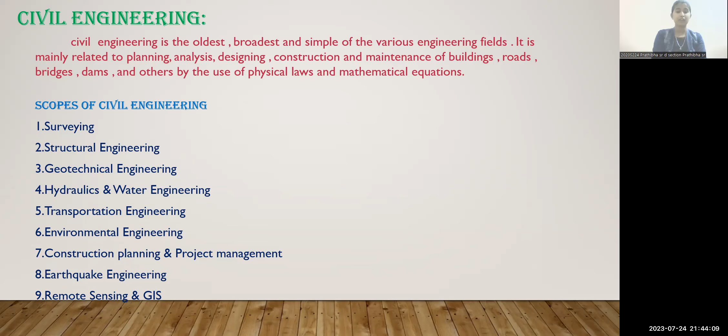Let us see what are the scopes of civil engineering: surveying, structural engineering, geotechnical engineering, hydraulics and water engineering, transportation engineering, environmental engineering, construction planning and project management, earthquake engineering, and remote sensing GIS.

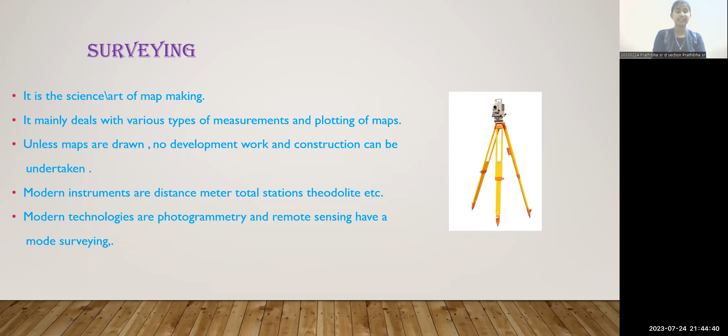Let us see what is surveying. It is the science or art of map making. It mainly deals with various types of measurements and plotting of maps. Unless maps are drawn, no development work and construction can be undertaken. Modern instruments are distance meter, total stations, theodolite, etc. Modern technologies like photogrammetry and remote sensing are also modes of surveying.

Building materials: the materials used for construction of any structures are called building materials. Shelter is the basic need for every human being. The important factors considered while selecting materials are durability, strength, appearance, cost, availability, and labor requirements.

Building materials are mainly divided into natural, like sand, stone, timber, etc. Second one, artificial, meaning man-made: bricks, cement, concrete, flooring or roofing tiles, steel, glasses.

Concrete is a mixture of fine aggregates like river sand, coarse aggregate like jellies, and cement. Fine aggregates are particles with each size less than 4.75 millimeter sieve. Next, coarse aggregate: particle size more than 4.75 millimeter.

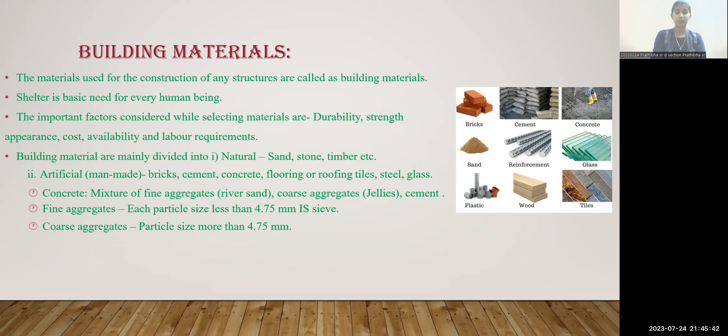Next, geotechnical engineering. It mainly deals with the study of soil, its types, and their properties. Soil properties may change from place to place, depth to depth, and even in the same place season to season.

Any buildings, bridges, dams, or retaining walls, etc., consist of components like foundations. The foundation is laid from a certain depth below the ground surface till a hard layer is reached. The soil should be thoroughly checked for its suitability for construction purpose.

The study dealing with the properties and behavior of soil under loads and changes in environmental conditions is called geotechnical engineering. Geotechnical engineers analyze the soil to determine its suitability to support extreme loads. Proper geotechnical engineering is essential for safe and secure structures.

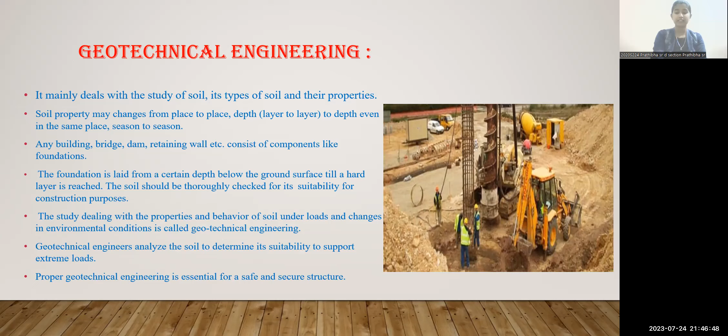Next, structural engineering. It deals with analysis and design of various structures like steel structures, trusses in industrial buildings, towers, etc., and concrete structures like buildings, bridges, dams, etc. Analysis means assessing or determining the internal force or stresses developed in structural components of any structure due to applied load.

Next, designing: fixing or finding the suitable dimensions for structural components of any structure using various methods is called design.

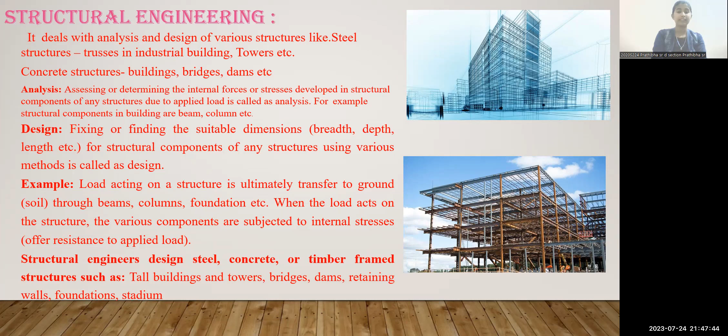For example, load acting on a structure is ultimately transferred to the ground or soil through beams, columns, foundation, etc. When the load acts on the structure, the various components are subjected to internal stresses. Structural engineers design steel, concrete, or timber frame structures such as tall buildings and towers, bridges, dams, retaining walls, foundations, and stadiums.

Next, construction planning and project management. Construction management deals with different types of construction of structures like buildings, roads, bridges, etc., including construction of underground tunnels using modern equipment.

Construction of floating structures: earlier days, only manpower was utilized for construction, but development of new technology, for example manufacturing of new machineries like cranes to lift weight, painting machines, plastering machines, concrete or tar laying machines, have made construction easier and faster.

Planning management involves planning for construction equipment and machinery for a construction project. It deals with planning, scheduling, and execution of construction activity related to a project, and comprises materials, time, and money management. Emphasis will be on new construction practices such as precast construction and pre-stress construction, safety of men, and utilization of marginal materials, etc.

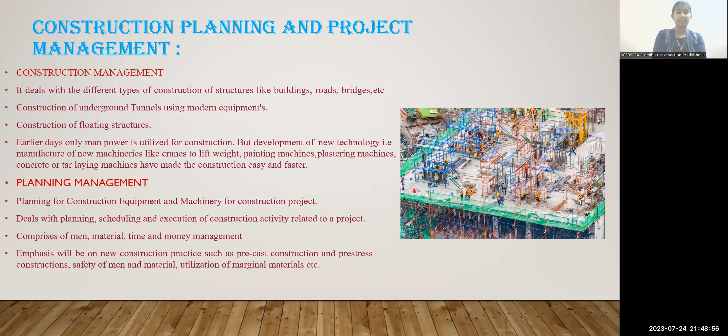Next, hydraulics and water resources and irrigation engineering. In hydraulics, as we know, water is a very important need for all human beings.

It mainly deals with the study of mechanics of water and its flow characteristics like pipe flows, open channel flows, dams, irrigation, hydropower, etc. Applications include determination of fluid properties such as density, vapor pressure, etc., and design of hydropower.

Water resource and irrigation engineering deals with tapping or storage of water and supplying water to agricultural fields for crop cultivation and drinking purposes, and to other domestic or industrial uses. Suitable water resources are identified and stored. Identifying, planning, and building water retaining structures like dams and tanks, and carrying stored water to needy areas is known as water resource engineering.

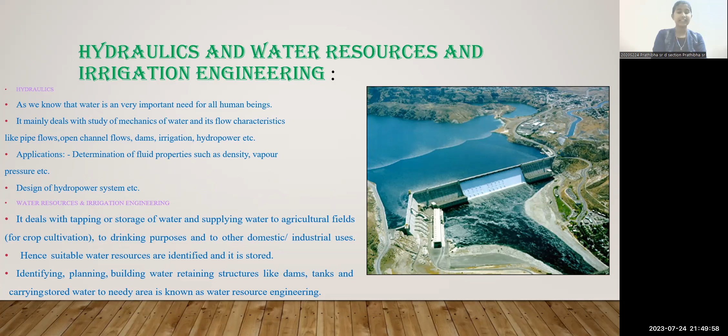Transportation engineering plays a very important role in economical development of a country. It mainly deals with study of existing transportation systems and their improvement for safe drive. It mainly includes design, construction, and management of roads, railways, navigation, and air routes.

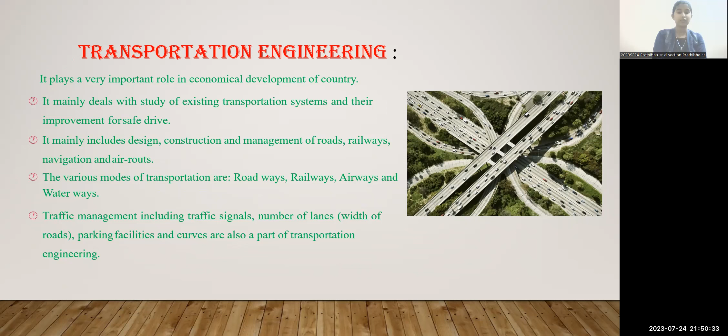The various modes of transportation are roadways, railways, airways, and waterways. Traffic management, including traffic signals, number of lanes, width of road, parking facilities, and curves, are also a part of transportation engineering.

Remote sensing and GIS is one of the new fields. The improvement in space technology and availability of GPS enhanced the scope of geographic information systems. Good mapping techniques help to get required information accurately and quickly to effectively manage and monitor the available resources for optimal use.

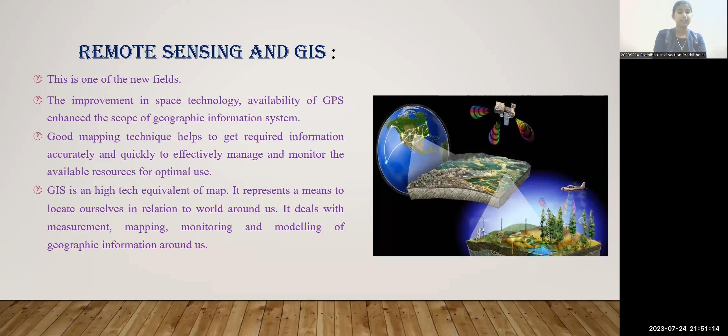GIS is a high tech equivalent of a map. It represents a means to locate ourselves in relation to the world around us. It deals with the measurement, mapping, monitoring, and modeling of geographic information around us.

Earthquake engineering. An earthquake is a sudden and rapid shaking of the ground due to passage of vibrations beneath, caused by transient disturbance of elastic or gravitational equilibrium of rocks.

The scientific study of earthquakes is called seismology. Earthquakes are measured using observations from seismometers. Seismic waves are recorded on instruments called seismographs. The time, location, and magnitude of an earthquake can be determined from the data recorded by seismograph stations.

Earthquakes with magnitude of about 2 or less are usually called micro earthquakes, and are generally recorded only on local seismographs.

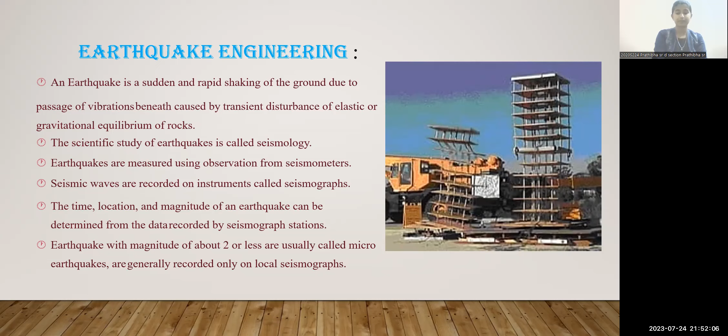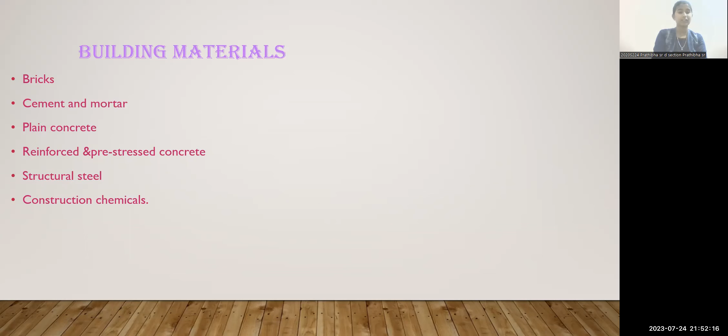Now let us see what are the types of building materials: brick, cement and mortar, plain concrete, reinforced and pre-stressed concrete, structural steel, and construction chemicals. Let us see one by one.

First, bricks. Bricks are obtained by molding clay in rectangular blocks of uniform size. As these blocks are of uniform size, they can be properly arranged, are light in weight, and hence bricks replace stones.

Classification: bricks can be broadly divided into two categories. One is unburnt or sun-dried bricks, and the other is burnt bricks.

Unburnt or sun-dried bricks are sun-dried with the help of heat received from the sun after the process of molding. These bricks can only be used in construction of temporary and cheap structures. Such bricks should not be used at places exposed to heavy rains.

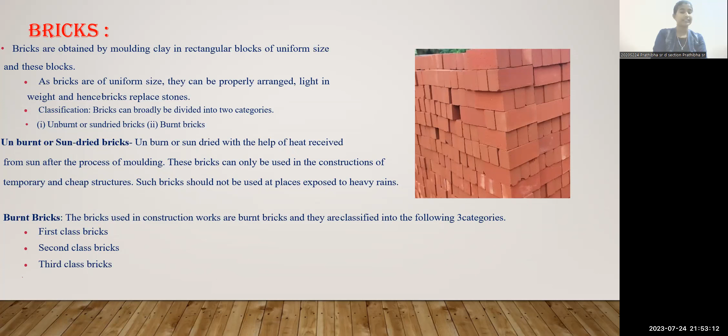Next, burnt bricks. The bricks used in construction works are burnt bricks, and they are classified into three categories: first class bricks, second class bricks, and third class bricks.

Let us see cement. A cement is a binder, a substance used for construction that sets, hardens, and adheres to other materials to bind them together.

Types of cement: ordinary Portland cement, commonly called OPC. It is a type of cement that is manufactured and used worldwide. OPC cements are available in three grades: 33 grade, 43 grade, and 53 grade.

Portland Pozzolana cement, PPC, is prepared by grinding fly ash with Portland cement. It is also produced by adding pozzolana with the addition of gypsum or calcium sulfate, or by intimately and uniformly blending Portland cement and fine pozzolana.

Portland slag cement is a type of Portland cement obtained by mixing Portland cement clinker and gypsum with granulated blast furnace slag in suitable proportions and grinding them into a thorough and intimate mixture.

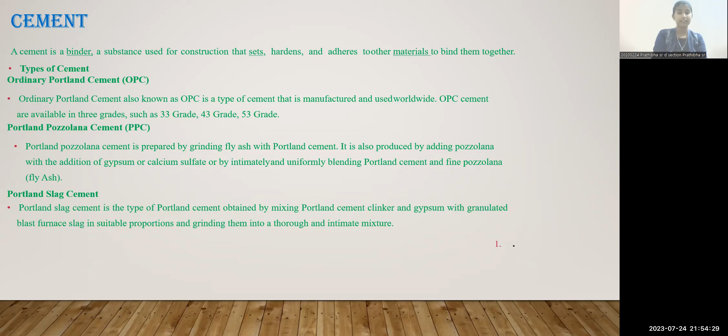Grade of cement. The grade of cement indicates the strength of the cement, generally measured as compressive strength. Compressive strength is the strength of cement molded in a standard cube after 28 days of curing.

33 grade cement means that the compressive strength of the cement after 28 days is 33 Newton per millimeter square when tested as per Indian standard under standard conditions. Next, 43 grade cement.

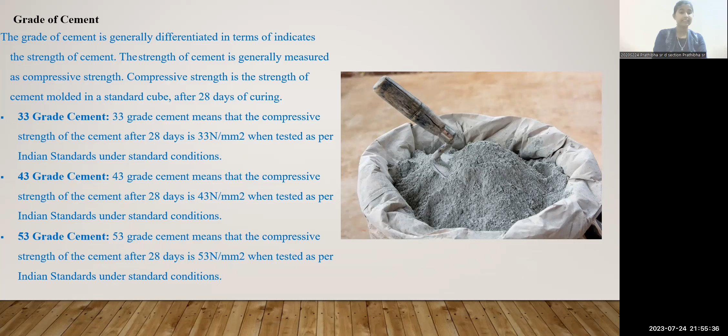43 grade cement means that the compressive strength of the cement after 28 days is 43 Newton per millimeter square when tested as per Indian standards and under standard conditions. 53 grade cement means that the compressive strength of the cement after 28 days is 53 Newton per millimeter square when tested as per Indian standards under standard conditions.

Next, let us see more about mortar. It is the mixture of cement, sand, and water. Uses of mortar: mortar is used between the joints of the bricks during the construction of walls. It is also used to give a soft, even bed between different layers of bricks or stone masonry for equal distribution of pressure over the bed.

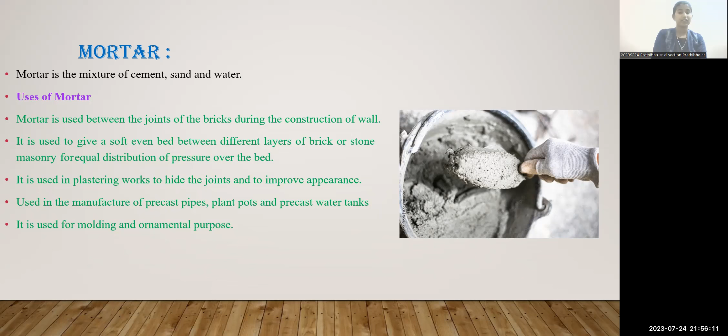It is used in plastering works to hide the joints and to improve appearance. Used in the manufacture of precast pipes, plant pots, and precast water tanks. It is used for molding and ornamental purpose.

Concrete is obtained by mixing cement, fine aggregate which is sand, coarse aggregate which is crushed stone, and water in a definite proportion. These are mainly classified into three types: plain cement concrete (PCC), reinforced cement concrete (RCC), and pre-stressed concrete (PSC).

Plain cement concrete is a construction material composed of cement, fine aggregate which is sand, and coarse aggregate mixed with water, which hardens with time.

Reinforced cement concrete (RCC). Concrete has very high compressive strength, but it is low in tensile strength. Wherever tensile forces are involved, like in slabs and beams, it is recommended not to use plain concrete. So adding steel to the concrete is the solution, as steel has high tensile strength and also possesses good compressive strength.

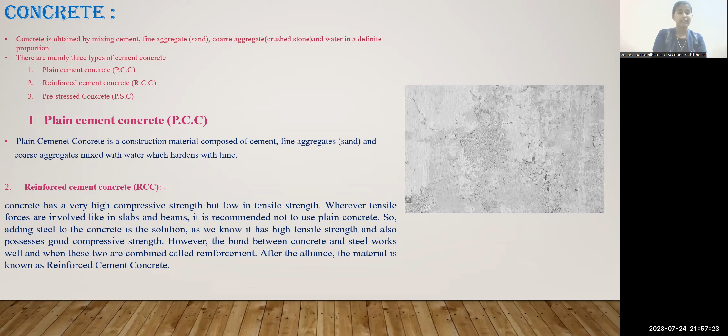The bond between concrete and steel works well, and when these two are combined, it is called reinforcement. After the alliance, the material is known as reinforced cement concrete.

Pre-stressed concrete is a system devised to provide sufficient pre-compression in the concrete beam by tensioned steel wires, cables, or rods so that under working conditions the concrete has no tensile stresses, or the tensile stresses are so low that no visible cracking occurs.

Types of pre-stressing: Pre-tensioning. In this method, the concrete is pre-stressed with tendons before placing it in position. This method develops due to bonding between the concrete and steel tendons. Pre-tensioning is preferred when the structural element is small and easy to transport. In this method, similar pre-stressed members are prepared, and pre-tensioning members are produced in molds.

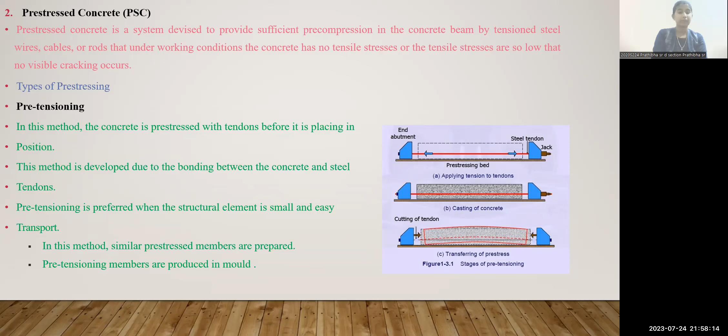Next, post-tensioning. In this method, pre-stressing is done after the concrete attains sufficient strength. This method develops due to bearing. Post-tensioning is preferred when the structural element is heavy. In this method, products are changed according to the structure, cables are used in place of wires, and jacks are used for stretching.

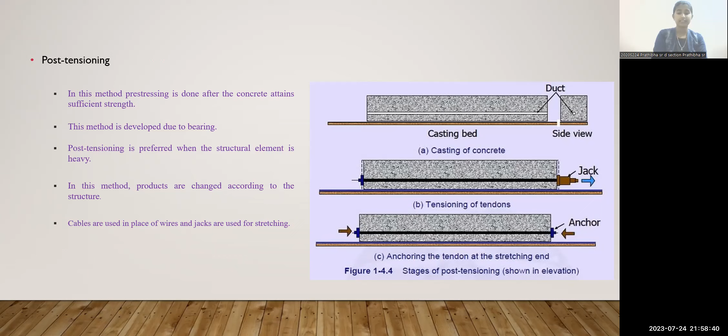Steel is an alloy of iron and carbon containing carbon from 0.25 to 1.25%. Steel is highly elastic, ductile, malleable, forgeable, and weldable. Types of steels: mild steel, tor steel, high tensile steel.

Uses of steel: as a structural material in trusses, beams, and in the form of various sections. As a non-structural component for grills, windows, doors. It is used in the fabrication of steel pipes, tanks, etc. It is also used as corrugated sheets which act as roof over the structure.

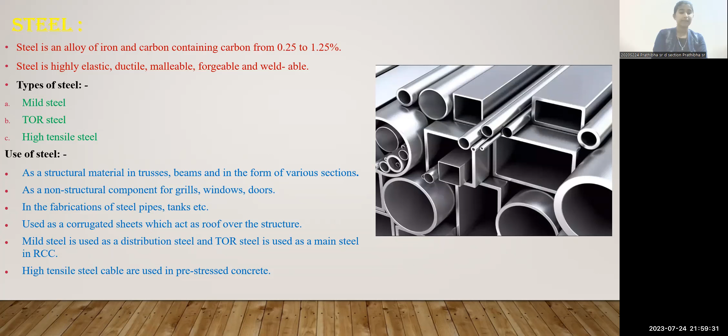Mild steel is used as a distribution steel and tor steel is used as a main steel in RCC. High tensile steel cables are used in pre-stressed concrete.

Construction chemicals, adhesives: these have rich bonding properties apart from weatherproofing and waterproofing. They are widely used in all types of construction works, which include panel fixing, tile fixing, and floor covering.

Sealants and caulks are construction chemicals that are used to block an opening surface or small cracks to prevent liquid or gas or moisture leakage that can damage the construction.

Epoxy grouts: these chemicals are used for grouting and have a high durability property and can be applied even in extremely high temperatures. These chemicals are quite expensive.

Next, admixtures. Admixtures are used to modify the flow characteristics, strength, and durability of concrete.

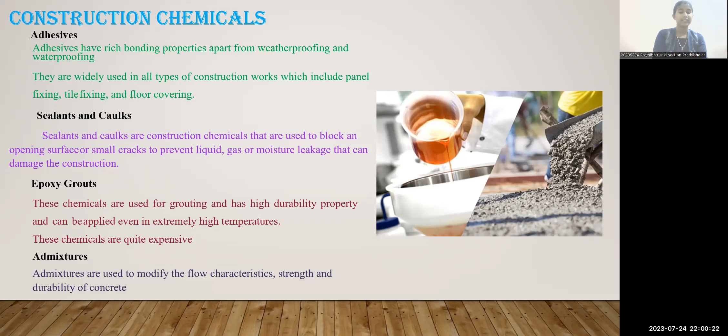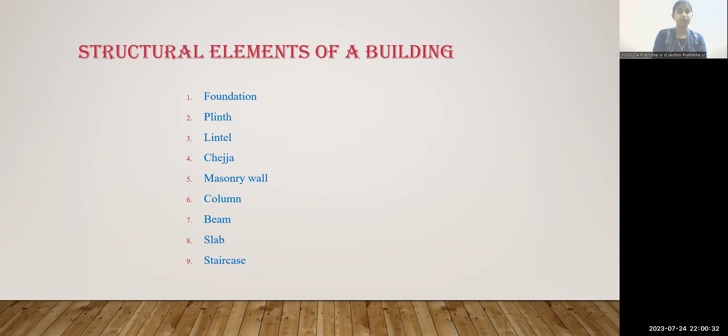Next, let us see the structural elements of a building: foundation, plinth, lintel, chejja, masonry walls, column, beam, slab, and staircase. First, foundation: it is the lowest part of the building structure resting on soil below ground level. It is the first structural unit to be constructed for any building's construction.

Let us see what are all the functions of foundation. It transfers all the loads of the building through beam and column arrangement.

It distributes the load evenly and safely to the ground. It also prevents settlement of the building. Let us see what are the types of foundation.

Following are the different types of foundations used in construction. First, shallow foundation: individual footing or isolated footing, combined footing, strip foundation, raft or mat foundation. Next, deep foundation: pile foundation and drilled shafts.

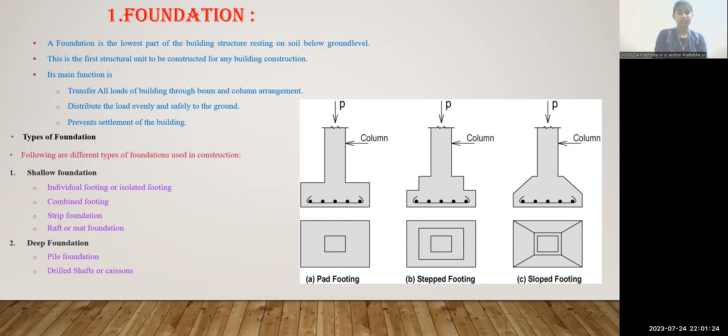Next, plinth. The plinth is a part of foundation constructed either at or above the ground. It is the offset created between ground level and the superstructure of the building, made by constructing a brick or stone wall or RCC beam from the ground level to the flooring level of the building. Plinth constructed by reinforced cement concrete beam is called a plinth beam.

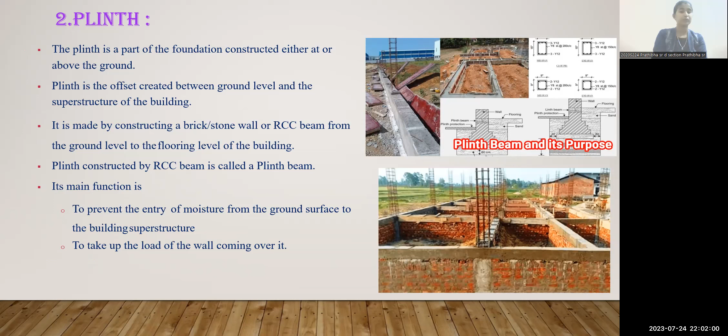The main functions are: it prevents the entry of moisture from the ground surface to the building superstructure, and it takes up the load of the wall coming over it.

Next, lintel. Lintels are constructed above wall openings like doors, windows, etc. Normally, lintels are constructed by reinforced cement concrete. In residential buildings, lintels can be constructed from concrete, bricks, or stone masonry. The main function of the lintel is to support the weight of the wall coming over the openings. Types of lintels: timber lintel, stone lintel, reinforced brick lintel, steel lintel, and RCC lintel.

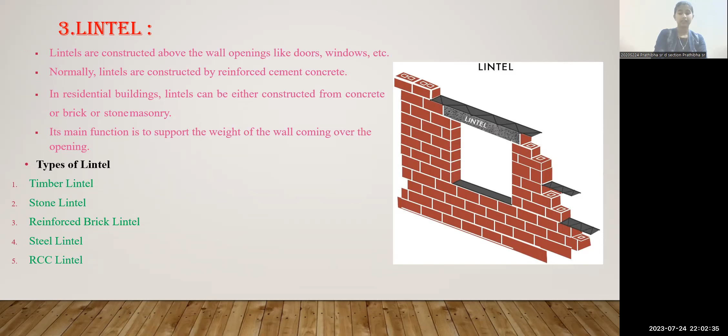Next, chaja. It is a structure generally constructed above the window and projected outside from the window face. Chaja can also be provided above the doors, and is constructed from reinforced cement concrete.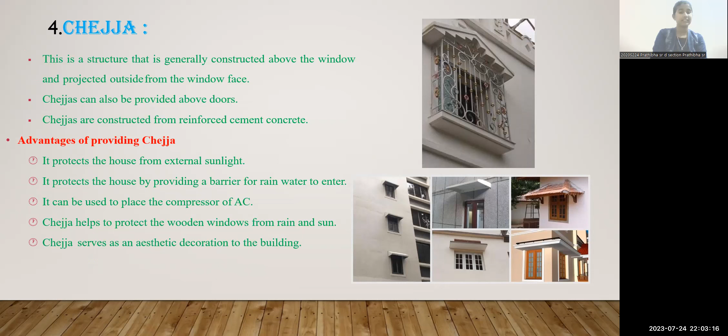Let us see the advantages of providing chejja. It protects the house from external sunlight and provides a barrier for rainwater to enter into the house. It can be used to place the compressor of an AC. Chejja helps to protect wooden windows from rain and sun, and serves as an aesthetic decoration to the home.

Masonry wall. Walls are vertical elements of buildings which support the roof. They provide an enclosure and protect against wind, sunshine, rain, etc. Doors and windows openings are provided in the walls for ventilation and access to the building. It can be constructed using stones, bricks, concrete blocks, etc.

Different types of bonds are used for constructing walls. The main function of masonry wall is to provide an enclosure and protect against wind, sunshine, rain, etc. The main components of masonry walls are masonry units like mud bricks, cement concrete bricks, and hollow bricks. Masonry mortar is used between the joints of the brick layers.

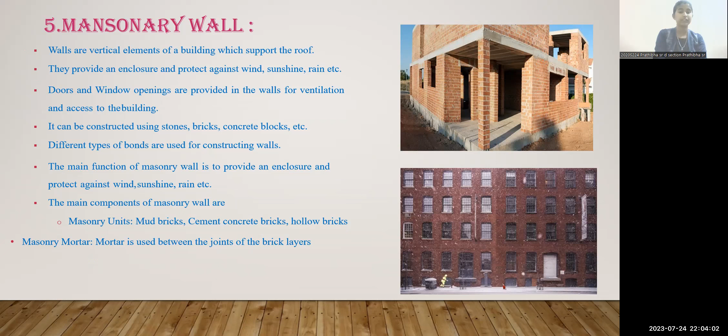Next, columns. Columns are the vertical members constructed above the ground level to support any structural frame. Load coming from the slab and beams are transferred to columns, and columns transfer the load to the footing safely. Columns can be divided into two types.

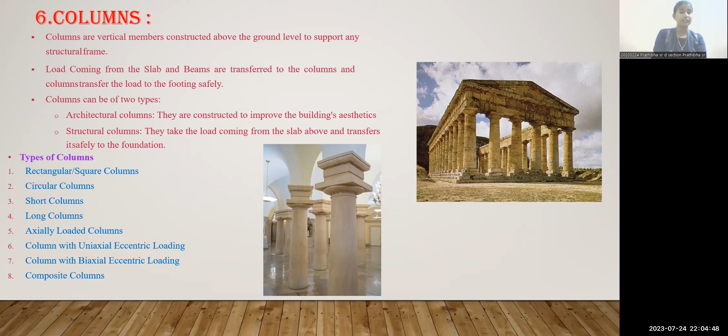Architectural columns are constructed to improve the building's aesthetics. Structural columns take the load coming from the slab above and transfer it safely to the foundation. Types of columns: rectangular or square columns, circular columns, short columns, long columns, axially loaded columns, column with uniaxial eccentric loading, column with biaxial eccentric loading, and composite columns.

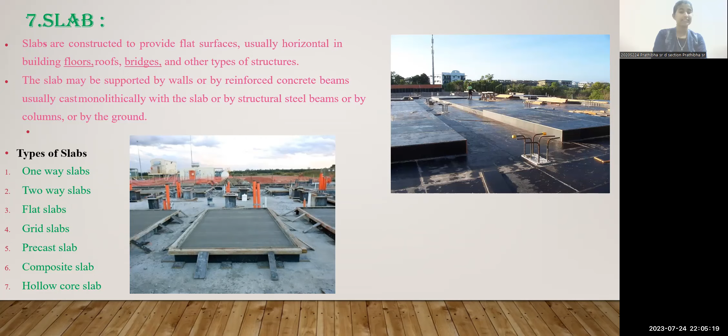Slab. Slabs are constructed to provide flat surfaces, usually horizontal, in building floors, roofs, bridges, and other types of structures. The slab may be supported by walls, or by reinforced concrete beams usually cast monolithically with the slab, or by structural steel beams, or by columns, or by the ground. Types of slabs: one-way slab, two-way slab, flat slab, grid slab, precast slab, composite slab, and hollow core slab.

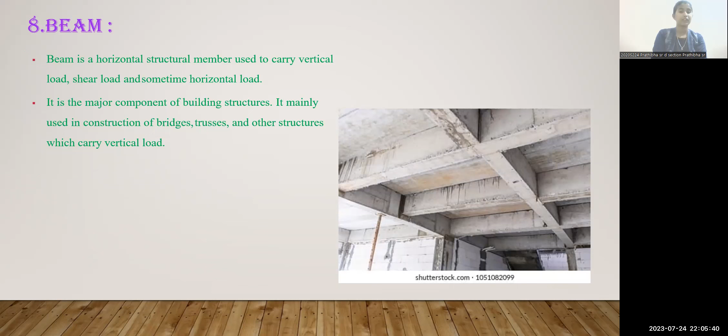Beam. A beam is a horizontal structural member used to carry vertical load, shear load, and sometimes horizontal load. It is a major component of building structure, mainly used in construction of bridges, trusses, and other structures which carry vertical load.

Staircase. A staircase is a sequence of steps that connect different floors in the building structure. The space occupied by the stair is called a stairway. Stairs can be constructed by wood, steel, brick, stone, or RCC, etc.

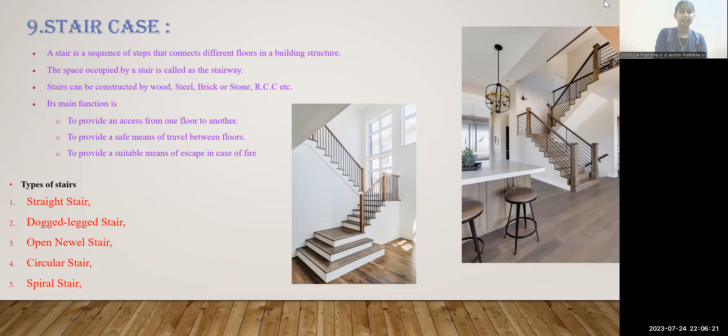The main function of staircase is to provide access from one floor to another, to provide a safe means to travel between floors, and to provide a suitable means of escape in case of fire. Types of stairs: straight stair, dog-legged stair, open newel stair, circular stair, and spiral stair. Thank you.